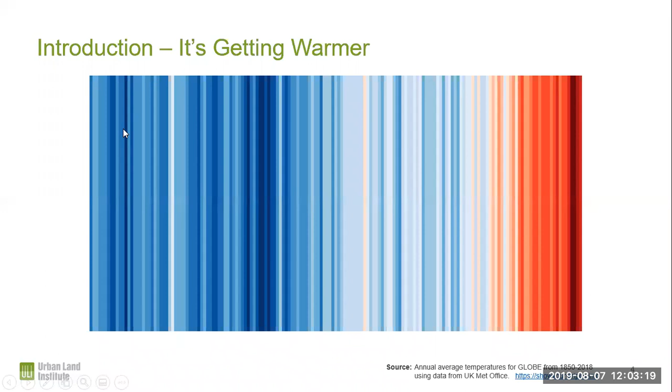So we're ready to get started. If you haven't noticed, it's getting warmer. It's a hot summer, and it's been record-breaking across the nation and the world, and it seems to be only getting worse. What you're seeing on your screen is a visualization of global climate data going back over 170 years.

This data is presented by a website called Climate Stripes, and you can get this information for your own locality, but it shows the highlights of how information can be visualized and present this climate change data in a new and interesting way. But as we see the news articles around the world, things like heat waves in Europe, we had a heat wave in the East Coast that was record-setting.

We have wildfires in Siberia, which is unusual to say the least, and a lot of issues that are really highlighting the need for better thinking around heat and heat mitigation, not only for just climate change reasons, but for urban heat island effects. As our society globalizes and urbanizes, we do have more and more people living in urban heat island types of areas, and it becomes more and more of an issue no matter what jurisdiction or climate you live in.

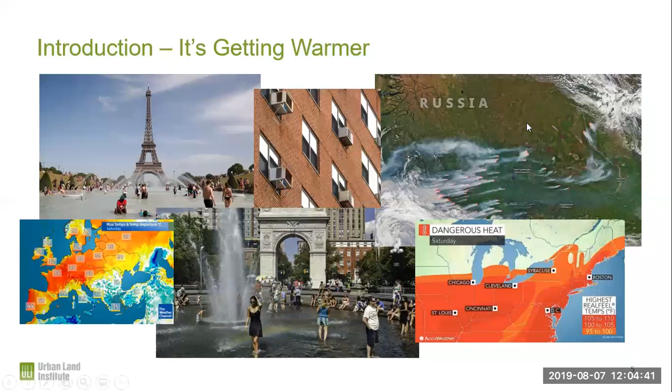I'm the moderator. I'm with a company called Retech Advisors. We are glad to have a great panel of panelists today to help present today's discussion: Ladd Keith from the University of Arizona, Kizzy Charles Guzman from the City of New York, and Johnny Campbell from Sundance Square in Fort Worth, Texas. I'm going to let each of them introduce themselves as part of their presentations and give more detail on their backgrounds and what they're working on, and really learn from their expertise in the work they're doing.

The anchor point or the rationale for today's webinar is the release of a report from ULI called Scorched, Extreme Heat and Real Estate. This report is going to be available today and tomorrow, and you'll see press releases and information on the ULI website and the URL that you can see here.

Very compelling information and case studies presented in this report. We recommend that everybody try and read this and review the information. There's background on the science and the impacts of heat and the impacts of health and wellness and economic productivity around heat issues, implications and opportunities for the real estate sector, whether it's development, city planning, etc. Policy and the extreme heat policy landscape and policy ideas and examples, and then of course case studies and innovations that are happening around the country, some of which we'll hear about today.

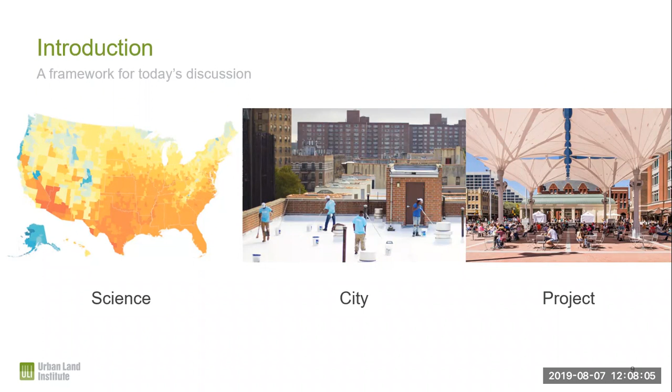This is Ladd Keith. I'm an assistant professor in planning at the University of Arizona. My research area is very much in line with today's webinar. I look at the intersection of urban planning and climate science, specifically working with cities to respond and prepare for climate change to increase their sustainability and resilience. Traditionally, a lot of those impacts that cities have been focused on previously have been coastal sea level rise and urban flooding, but extreme heat is certainly becoming a more noticeable impact.

And so the timing of this ULI report is perfect. So like Jack mentioned, I'll talk about some of the science behind the causes, some of the impacts, and then some of the ways that cities are addressing the risk.

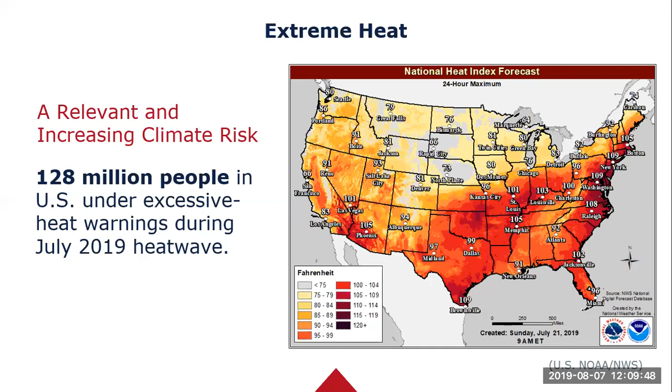And it's not just an issue in the United States, but in 2019 alone, heat waves have been breaking records in places across the world. Just doing a quick search, there were heat waves in Australia, Japan, and India, the Pakistan heat wave, and of course, the European Union heat wave in June. So this is definitely a global issue that cities are grappling with right now.

So just to talk about some of the causes of extreme heat and the ways that we think about what's causing the increase, one of the big contributors is actually the urban heat island effect, which many people know about, but it's basically the idea that the built environment and urban activity result in higher temperatures in urban areas than their rural and natural surrounding lands. And this isn't something new in science. We actually observed this back in 1818. Luke Howard was the climatologist in London who discovered and documented the urban heat island effect. So that's 1818, and we're just now starting to really think about it because it's getting worse.

Building materials is a big contributor, and so how much impervious surfaces there are. And then things like vegetation and humidity, so that could be urban forestry or water sources like ponds or rivers throughout urban areas can have impacts on that. And then other things too, like building equipment and waste heat emissions and also air pollution. So there's a whole range of complex things that kind of contribute to it. But the big idea is that large urban areas tend to have a higher UHI than smaller urban areas.

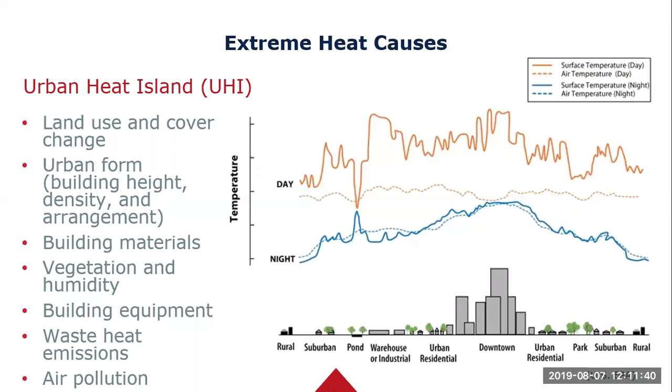And as you can see in the graphic, the arrangement of those places tends to do a lot with the impact of UHI. And so why we care about UHI is because in many cities, the difference between urban and rural areas can be on average about 10 degrees. But with the most extreme heat days, it can be as hot as 22 degrees. And that's quite a big difference. The big idea here is that we can use our understanding of UHI to reduce it and to increase our resilience to it. So we've kind of caused a lot of the UHI currently happening in large cities.

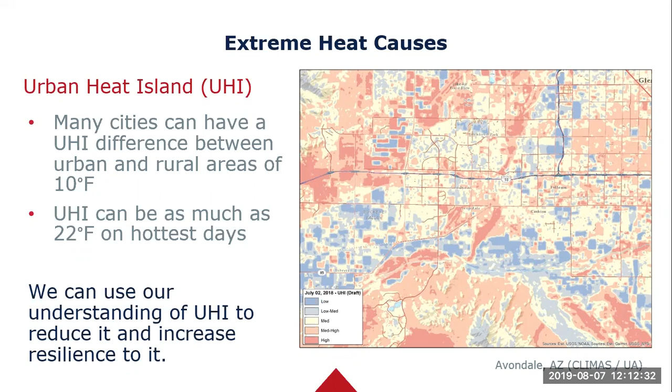And of course, the other big cause of extreme heat that we want to think about is climate change. And so we've had an increase in global average temperatures that have been very well documented. And those global average temperatures for specific locations are increasing the duration, frequency, and extremes of heat waves that are happening. And also important to mention that with climate change, there's a faster increase in nighttime temperatures, which have big implications for public health, because we need those cooler nighttime temperatures to let people rest and let their bodies recover.

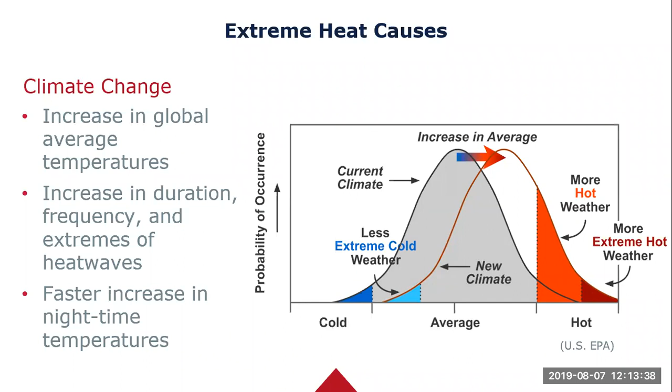And so, in fact, just a few days ago, this July 2019 was named the hottest month ever recorded by a European Union climate agency. And so those records keep breaking. We certainly expect to see that continuing in the future. And the graphic over to the right-hand side here just shows that even a small increase in the average temperature can lead to quite a bit more extreme heat waves and more hot weather. So even those small incremental global averages we're seeing are what's leading to these extreme hot temperatures.

And so looking at climate change projections, this is from the National Climate Assessment on the right-hand side for the United States. But the average annual temperature of the United States has already increased 1.2 degrees Fahrenheit in the last 3 decades. And we're projecting to see that increase from 3 to 12 degrees Fahrenheit by 2100, depending on emission reductions. And if you're not familiar with the different scenarios on the right-hand side, I think the important thing to look at is RCP 2.6 would be if we did the most possible to reduce emissions today, and RCP 8.5 is kind of the track that we're on.

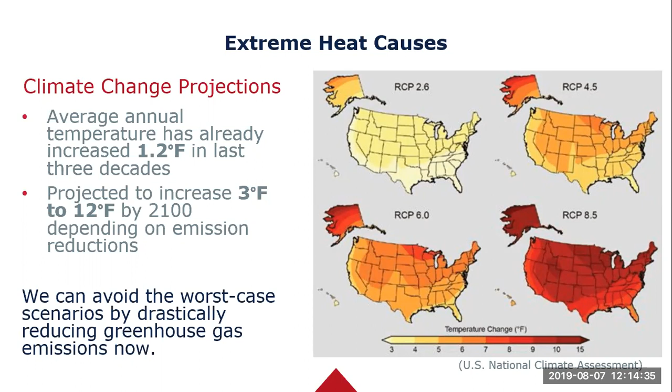And currently we are on RCP 8.5, so we're looking at something closer to 12 degrees Fahrenheit increases. But important to note that we can avoid these worst case scenarios by drastically reducing greenhouse gas emissions today. So hope is not lost, but we need to act on this much more seriously than we currently are. And so there are quite a few impacts for extreme heat.

And of course, these vary by location. And one thing to think about is locations that have been hot historically for a long time, like where I'm at in the Southwest, may have very different impacts than places like the temperate Northeast where maybe air conditioning isn't as widespread. So as you look at these different impacts, just think of your own location and how these might be different for you.

But obviously public health is a huge concern with extreme heat. Heat's actually the #1 cause of climate-related deaths in the United States. So not the more noticeable hurricanes or flooding or tornadoes, but actually heat is the #1 cause of death. But then also thinking less about mortality and more about quality of life. So can children go out and play in playgrounds? Can people go down Main Street and do their shopping during the day? So those quality of life questions are really important too.

There's economic impacts. A 2014 paper found that extreme heat can reduce productivity by up to 25%. And so we see that certainly in hotter locations in the Southwest. On hot days, retailers consistently report that they have less traffic than during cooler days. And so think through what that might mean for your specific location. There's impacts for energy and water usage. And so it could be things as dramatic as blackouts when energy increases, but also just the idea that more air conditioning usage does lead to more greenhouse gas emissions, and that's something that we don't want to do.

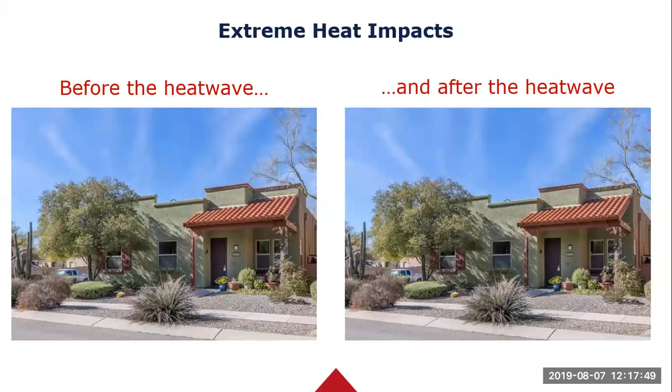So heat can be a difficult thing to talk about, and it can be a difficult thing to get the public's attention on. As you can see in this picture, before the heat wave sometimes looks exactly like after the heat wave. And especially if you have air conditioning, the only thing you might notice would be a hotter walk to a car as you drive to work. So we want to think about it as being an invisible climate risk sometimes compared to sea level rise, flooding, or wildfires.

So that is one of the challenges of dealing with extreme heat because it is a little bit more of an invisible climate risk and it has previously gotten less press attention. It's also a compounding risk, and so deaths by extreme heat aren't often listed as deaths by extreme heat, but often people may have underlying health issues like heart conditions that extreme heat compounds that risk and leads to death. And so it can be really difficult for public health agencies to kind of tease those things out, and they're absolutely getting better at it, but that's historically been an area of weakness.

It's also difficult to measure some of the other impacts like the economic impacts or the ecological impacts of extreme heat. Of course, the most vulnerable are at the highest risk, and so you can think of the elderly and children, but then also outdoor workers and agricultural workers are at high risk for extreme heat, and also those without air conditioning in a lot of locations.

There's a lack of governance structure historically around heat, and so comparing this with something like flood risk, we have a national flood system and FEMA maps, and there's flood insurance. And so lots of municipalities have floodplain management departments, and heat is not set up in the same way, where there's generally not a specific person tasked with dealing with extreme heat in a city. So thinking through how those governance structures are evolving over time is important.

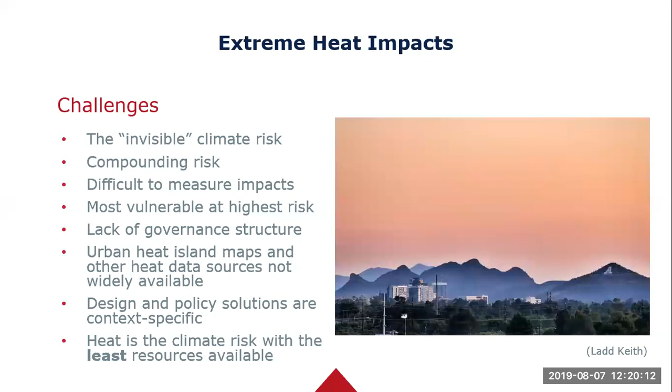And then finally, heat is the climate risk currently with the least resources available. And there was a great paper done a few years ago that had a survey of climate adaptation resources across the United States. And that paper found that only 4% of those resources available to planners and cities dealt specifically with extreme heat. And so that's increasing in the last couple of years, and this ULI report is part of that. But historically, it's been the climate risk with the least resources available.

So ending on a more positive note, though, there are opportunities and positive things happening with addressing extreme heat. So it's a rapidly growing area of interdisciplinary research. And so myself at the University of Arizona and our colleagues up at Arizona State University and many other universities are doing great research on this and advancing knowledge on it.

There's more context-specific heat reduction strategies, and then public health agencies are really leading the way with prevention and response strategies, both before, during, and after extreme heat events. And then finally, like I mentioned, although heat governance hasn't really been a thing in the past, it's certainly evolving, and it's been kind of exciting to see how different cities are dealing with that.

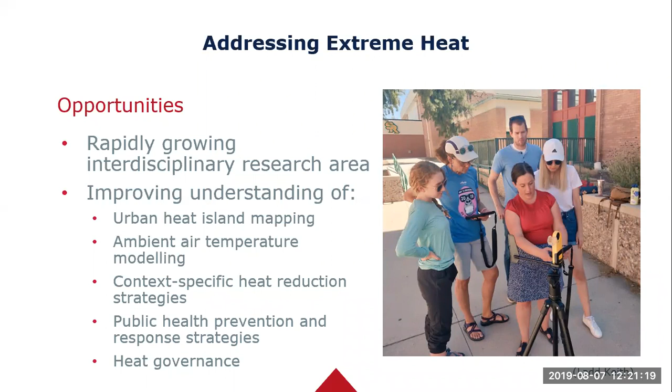More opportunities include thinking back to before we had air conditioning, and we had local traditional architecture in the Southwest particularly that had historic examples of how to deal with heat before air conditioning. But then we also have a lot of new modern projects being built that are also heat adapted, and those are very nicely profiled in the ULI report that's coming out, as well as emerging extreme heat mitigation and adaptation strategies for both the public and private sector.

And so the big idea here is that we can design heat adapted sites and plan cities to both reduce extreme heat and urban heat island, as well as continue to reduce greenhouse gas emissions. And we want to make sure that we do both of those things at the same time and don't chase maladaptive solutions where we might install a ton of air conditioning, but then that's still increasing emissions and contributing to global climate change. So we want to think through all of those things together.

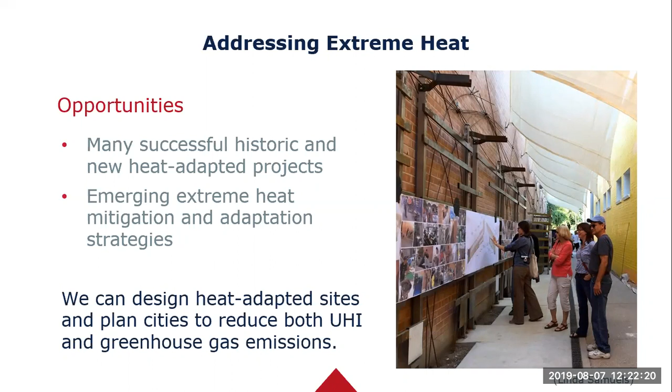Being based in the Southwest, I'm curious if there's some quick takeaways or things that you've learned that the rest of the country can learn. I know you said it's context and geographically specific, but are there some broader lessons that the Southwest can teach the rest of the country?

Absolutely, and I would say a lot of solutions I would not recommend for every place as a blanket recommendation, but I think shade is one of those things that really works well in all situations. So thinking through whether shade is being provided on the site scale, or on the neighborhood or city scale, if you're doing things like providing cool corridors for people to walk in high traffic areas to the nodes of activity. So planning shade really productively is a strategy that a lot of cities can use.

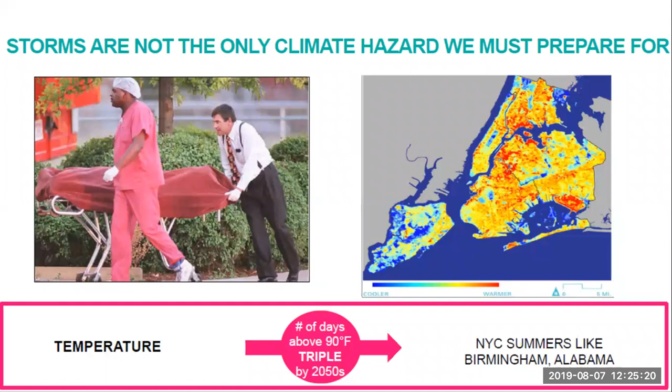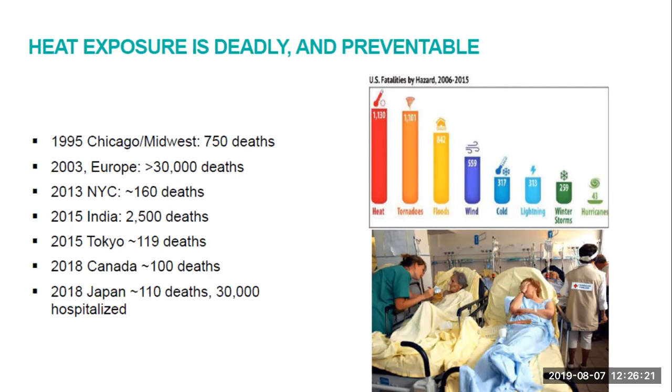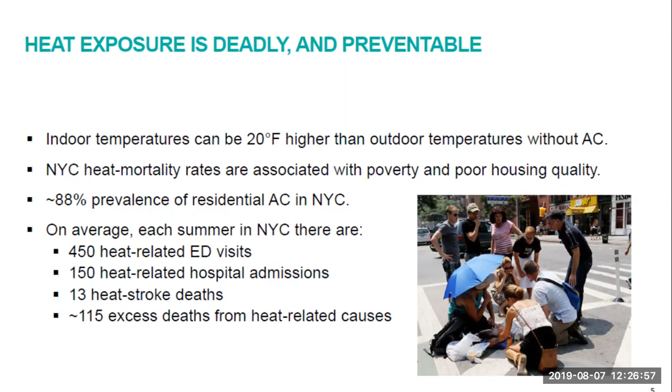We also know that indoor temperatures can be up to 20 degrees higher than outdoor temperatures without air conditioning, and that New York City heat mortality rates are associated with poverty and poor housing quality. On average, we see each summer in New York that there are about 450 heat-related emergency department visits and 150 heat-related hospital admissions, 13 heat stroke deaths, and about 115 excess deaths from heat-related causes. So lack of access to air conditioning and heat-related mortality in high poverty neighborhoods go hand in hand.

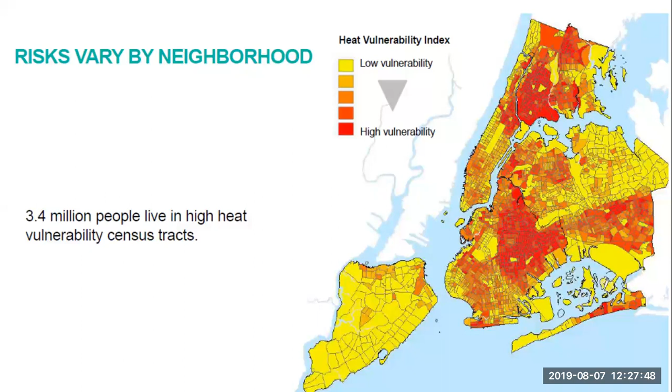I do want to highlight that while some neighborhoods here in red, for example, are more at risk, there are vulnerable groups living in all of our neighborhoods, right? So there would be older adults, low-income people, those who have certain health conditions, etc. So over the years, the city has implemented many strategies to protect New Yorkers during heat waves, but more work needed to be done specifically to reduce disparities in vulnerability to climate change.

So in 2017, we launched a comprehensive heat resiliency strategy that was aimed at reducing heat-related health impacts by lowering temperatures in those heat-vulnerable neighborhoods that I showed you. Also, the goal is to strengthen social networks and to improve quality of life for New Yorkers. So Cool Neighborhoods NYC is one of the case studies in the ULI Scorched report. So thank you for the shout out. And you can find our summary report online if you're interested in the variety of initiatives that we're undertaking.

In the interest of time today, I'm only going to highlight 2 of them. But please note that this plan overall includes over $100 million of the city's budget to be invested in high-risk areas over a 4-year period. And I also want to highlight that even though Cool Neighborhoods does provide funding for new initiatives, there are projects in there that do not require any new additional funding to protect the most vulnerable populations.

So one key strategy in our plan is to invest over $100 million to plant street trees in historically underserved communities. Since we launched Cool Neighborhoods, our Parks Department has been planting trees strategically across city streets and small parks, and also doing some forest restoration targeting heat-vulnerable neighborhoods such as the South Bronx, Northern Manhattan, and Central Brooklyn.

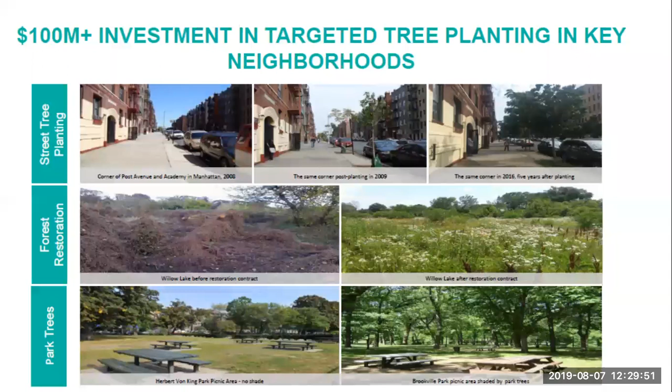Of course, the benefits of greening strategies include mitigating the urban heat island effect and relieving heat stress by increasing shade and providing cool corridors, right? But we also see a lot of other environmental and social co-benefits of community greening efforts. Note in the photos the incredible shading potential of street trees. However, because it does take 100 years to grow a 100-year-old tree, we have to try other approaches to help cool our public realm. So the second initiative I'll highlight for you is our Cool Roofs program.

As part of our Cool Neighborhoods strategy, roof coatings in heat vulnerable areas are prioritized, and outreach to buildings is targeted there so that we can achieve clusters of light colored surfaces to reduce building heat gain, energy consumption, and waste heat from air conditioners. In 2018, the first full year since launching Cool Neighborhoods, 73% of cool roofs installed were in the 2 highest heat vulnerability tiers.

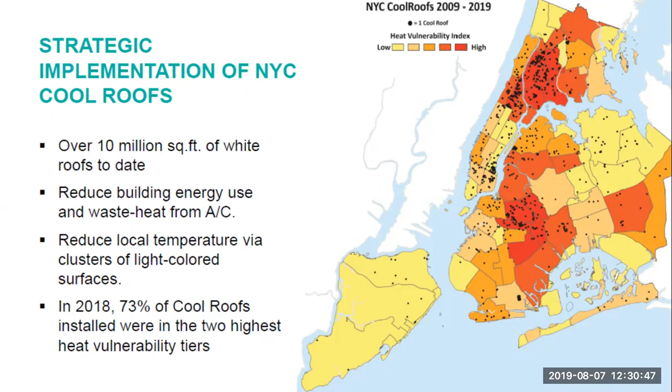This program is completely free for buildings that serve a nonprofit, affordable housing, or community or social service function, so we're focusing outreach there. Building owners can also get cool roofs for free if they request installation as part of a cluster of buildings in the same neighborhood. So the idea, again, is to concentrate as many roofs as possible in the geographies where we see the greatest public health and environmental impacts.

So the last plug I'll make about our work is that just this year, we enacted 2 local laws requiring all new buildings and those buildings that are undergoing major roof renovations to be covered with solar panels, green roofs, or some combination of the 2. The law is also expanding a previous policy that required cool roofs in new buildings because that old policy only applied to flat roofs. And so the new law also includes sloped roofs,

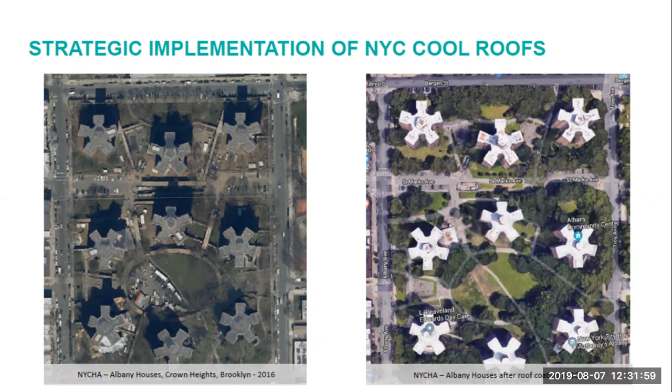so all of them trying to reduce urban heat hazards. So this means that New York City may now have the world's most comprehensive sustainable roofing policy. But we anticipate that because of this policy, we can expect about 1 million tons of greenhouse gas emissions reductions by 2030 and up to 1 million additional gallons of stormwater managed every year.

But we know that indoor temperatures without air conditioning can be substantially higher than outdoors, so we need to do more, period. We need to do more to address indoor risk. A recent New York City study found that indoor temperatures in non-air conditioned homes remain high for days after a heat wave, even at night, just because of the building's thermal inertia, right? So its capacity to store heat.

So here are some relevant headlines from the press, and I do want to highlight the case in Florida where the final death tally was actually 14 elderly residents. They died after Hurricane Irma knocked out the air conditioner to their South Florida nursing home, leaving the facility sweltering. However, the hurricane wasn't the only reason for this tragedy.

This happened because while the facility did have a backup generator, that generator was not feeding the air conditioning system. It wasn't connected to it. It wasn't able to do that. So in fact, in many instances, backup power systems do not address thermal comfort of building occupants at all. Air conditioners are still very much considered a luxury and not a medical necessity in many circles.

And in this case in Florida, the nursing home had initially alerted the County Emergency Operations Center that it had lost power, but when they were asked if they had any medical needs or emergencies, it did not request help for cooling. So there was a criminal investigation, and 12 of those 14 deaths were actually ruled homicides.

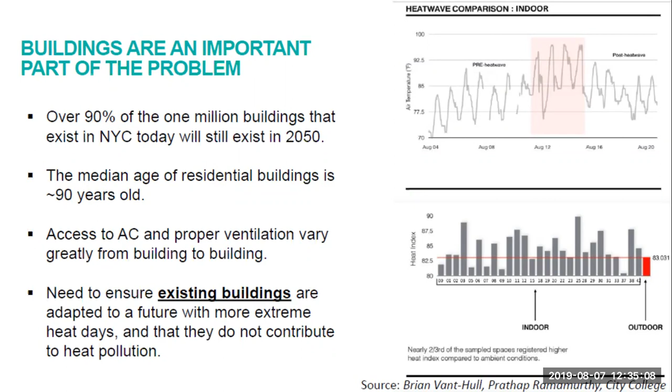One key takeaway that I can share with this group is that it is critical to design projects to withstand future climate conditions. For example, cooling and other HVAC systems should be provided for buildings to remain habitable, and the design should be based on the useful life of the components of the project. Because we thought it would be helpful to provide a framework for developers and agencies to understand how to do this, we released climate resiliency design guidelines, which are available online if you just Google those words.

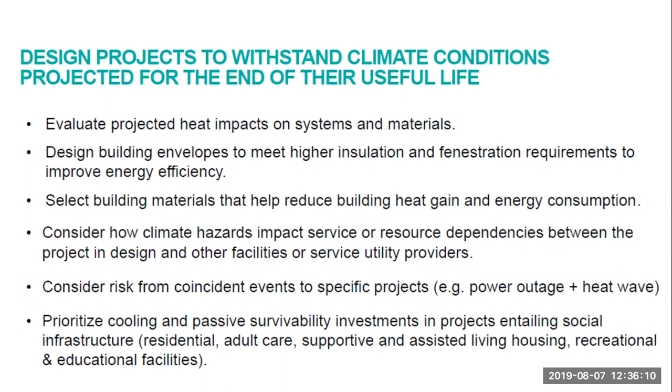I am not going to go over each of these bullets, but many are recommendations from the guidelines that you can review on your own time. Basically, the guideline recommends that project designers consider two aspects of the relationship between their project and increasing heat: the way the project increases or reduces the urban heat island effect, and the impact that rising average temperatures and increased frequency of extreme heat days will have on the physical components or operations of the facility itself. It's just as important to adjust a project design to reduce its own contribution to the urban heat island effect. Just because the facility itself is cool doesn't mean it did not increase the heat profile of the neighborhood where it is, right?

This would be the case if a project entails significant vegetation clearing, for example, or if it replaced permeable surfaces with a lot of heat-trapping asphalt. So the bottom line is you have to be thoughtful about the materials in the built environment and their role in driving temperatures higher in neighborhood communities and increasing demands on cooling systems, which leads to sustainability challenges. In our guidelines, we provide some guidance on how projects can reduce their contribution to ambient heat in the city, such as the strategies listed on this slide.

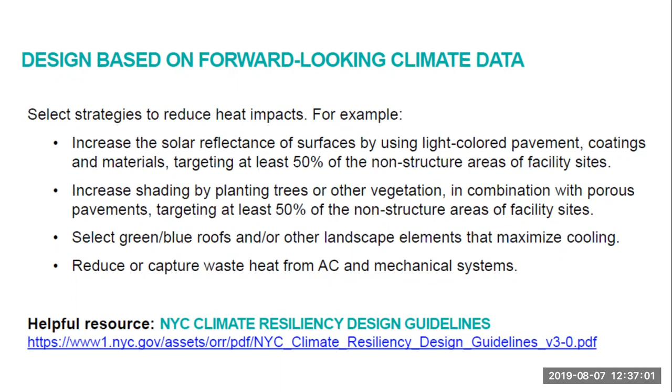Thank you, Kizzy. A follow-up question. One of the challenges that Ladd highlighted was what he called heat governance. I'm curious how New York, or how your work, deals with the governance of these issues, because I'd imagine it deals with different agencies as well as the private sector and real estate developers. How do you navigate that, what he calls the governance side of this issue?

Well, I think I would say, to be funny, that we navigated painfully. But no, we convene interagency and multi-sectoral working groups all the time in order to mine the best available science and strategies from all over the place, for all places, and to understand where the agencies are at in terms of implementation or funding, what their concerns are, and how we can help advance their mission in the climate-changing world.

So we don't develop these plans in a vacuum. We work closely with the city council and with our state and federal partners as well to understand what strategies work, what the potential for effectiveness is for each strategy, and it's a long negotiation process for sure. The items that can be legislated, we do, because we want to make sure an initiative doesn't die just with an administration change, right? If we believe in the challenges, then we believe in the solutions that can help solve them, and so we want to legislate that as much as possible.

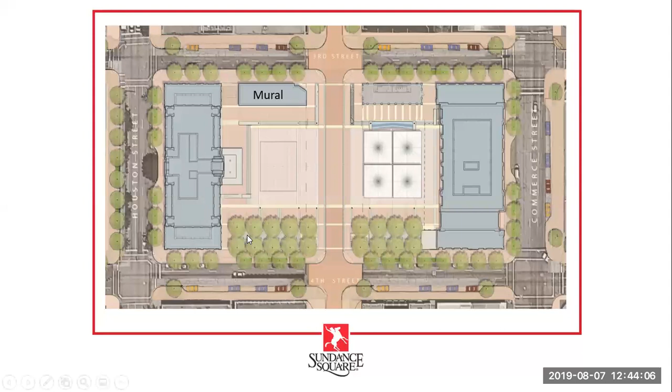We immediately moved from the question of how do we attract people to how do we create a space in which people will want to be, a space where people will find themselves comfortable and will also be the centerpiece. So the conversation quickly went to how do we handle heat, how do we handle these Texas summers?

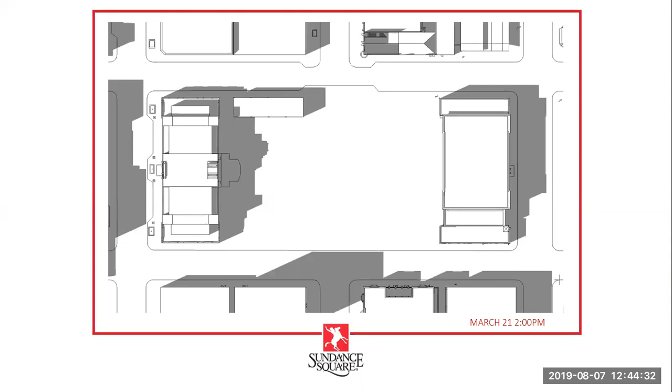So we started by looking at the buildings and studying shade coverage, studying how these new buildings we were adding - you can see the two bookend buildings here with the mural building - and you can see what the shade study said would be the shade coverage on March 21st at 2 p.m. Then next you can see how March 21st at 5 p.m. would look. We actually did these studies for all seasons, all throughout the day, so we could understand exactly what we could expect out of the space.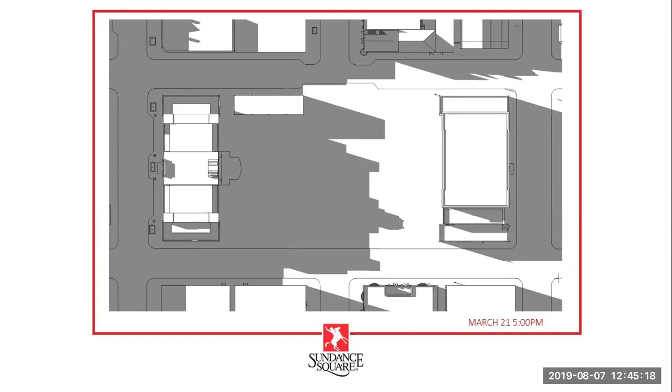You'll notice this is oriented correctly, so north is up, south is down, west is to the left, and east is to the right. You can see that as the sun sets to the west, the shade progresses from left to right across the plaza. So we began to understand that we were going to need to work with something on the east side that would create shade in the afternoon.

Having said that, I'm going to go back one slide. We also studied how all of the buildings and features would measure up in terms of shade coverage in the winter, the fall, the spring, and the summer, in the mornings and afternoons. Without plowing through the whole table, I'll just draw your attention to the center column where it says daily afternoon average, and if you look at the very bottom number, that's the summer.

In the daily afternoon, 8,640 square feet would be under shade pre-development. On the top chart, you can see that was increased to 26,860 square feet under shade after the development.

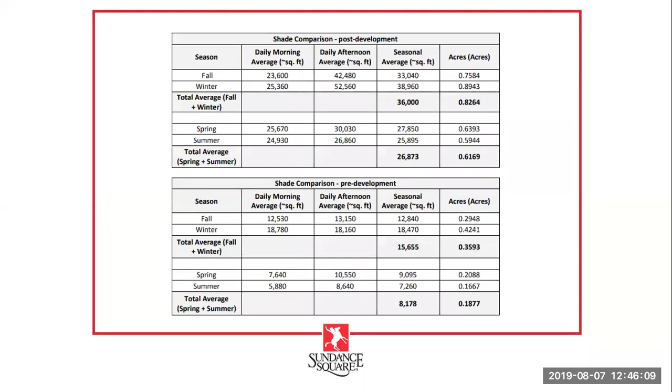So you can see that we were looking specifically at summer and trying to learn how we might create that space in a way that would also make it comfortable. We also added a bunch of features.

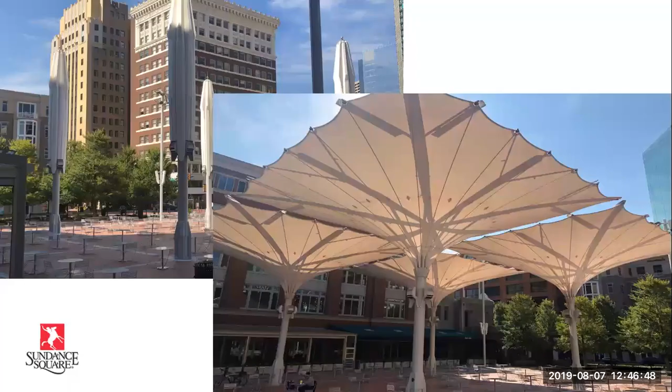One dirty little secret about programming is that it's much easier to program a space that is already attracting people than it is to take a space that isn't attracting people and program it into a great space. So we said we wanted to create a feature-rich plaza that had things to see, and if we were lucky, we would create features that would also create a good human scale and a good place for people to be.

In the photograph you're looking at now, we've got the things that we termed back in those days our magic umbrellas. On the left, you see them closed in a hard shell, which allows them to stay closed when we are in the wintertime, or if we've got events or things happening that require a little more headroom.

And then as the day progresses or as the heat comes along, these will open. I've got a 1-minute video, and I'm going to talk through it as I've just started, just to show how the east side of that plaza really works with these umbrellas.

You can see the morning sun casting over from the building now, and you can see these umbrellas opening. It takes them about 1 minute to open. Each of the umbrellas are 40 foot by 40 foot in length and width, and they're 35 feet tall, so they cast a 6,400 square foot shadow on the east side of that plaza.

So when the west sun comes across, you can see how that might actually affect the plaza and its operation during that time. This is one of those coincidences where I say that you can see the color of the umbrellas - they don't have a heat gain problem. They create a great shade area that people can be under.

It turns out that the landscaping is one of the secrets about taking the plaza, although it's an event space, and making it feel softer and cooler. We also have dancing fountains on the west side of the plaza.

These, to me, have created a great space. Obviously water's a great way to transmit psychologically a cooler space, but also you can see the kids are playing in the fountain. It's an actual cool space.

In the bottom right-hand corner photograph, I'll just point this out - this is the fountains turned off, and this is a movie night in a summer movie. In fact, it was last Thursday here in Texas. You can check that temperature - it was very hot. But those fountains, when the water drains back into the reservoir, the ground level is cool and creates a great space for people to sit in. You can see folks actually sitting on the ground there.

We've also created some smaller spaces like the one the arrow is pointing to now that are small contemplative spaces that have shade from both sides, but are places for people to sit. There's a fountain here and vines that grow up and across those wires as the summer progresses and creates some natural shade. And then on the south side of the plaza were those alleys of trees that you probably remember from the graphic.

And here are a couple of photos that show what they do to the sidewalks and the south edge of the plaza to create another great shaded space. This walkway you see on the left is a very popular walkway for people to move through just because of the shade.

And so I hope what I've demonstrated here is a thought process that started with programming and how we'll use a space to activate the area and all of the blocks we have around, but ended up quickly into a parallel course of creating a way to stop maybe some of the heat sink and the build-up of heat around. So with that, I'm going to pass it back to Jack and go on to Q&A.

Thanks, Johnny. We're getting a lot of questions about your umbrellas. I want to ask you about those in a second. But in our previous conversation, you mentioned some learning that you had about the material selection of the plaza, bricks versus concrete versus broken up granite, et cetera, and the way it behaved with the heat. Can you share that? I can.